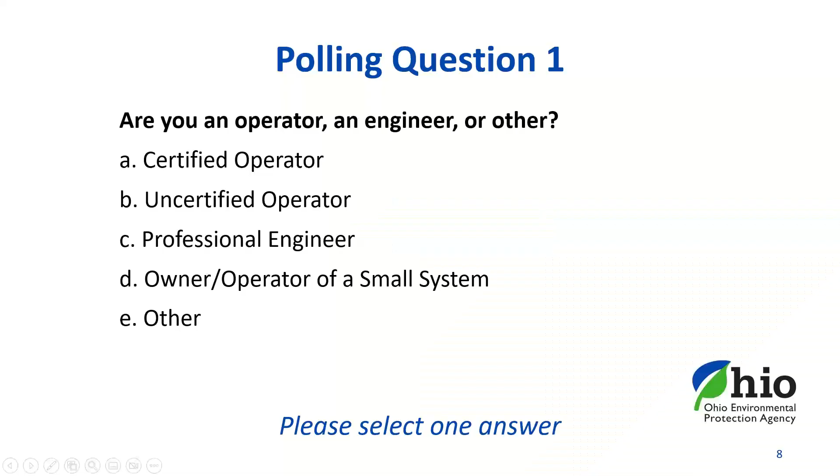Okay, so now we're going to go into the activated sludge process control and troubleshooting chart. I've been doing this, like I said, for 23 years, and I have pretty good control over what's wrong with treatment systems.

So, to begin with, way back in the middle 1970s, the Clean Water Act was enacted, and Section 104G1 was the section that provided for training for operators. Now in Ohio, the federal grant was used for equipment, supplies, travel, and training for us, okay? But some of the other states usually used it for their FTEs, and so they didn't have a whole lot of training equipment. But in Ohio, our positions were funded through normal revenues. But most importantly, and I say this very sincerely, the CAU had the support of management, and that is just so important for the CAU, to be honest.

So what we do is we provide on-site technical assistance to communities. And I really mean that, we do on-site, we go to the treatment systems. Typically, we go to smaller systems — the smallest ones are about 1,500 gallons per day — but we also go to large systems too. And if they have treatment issues, we can go and solve those problems as well. But what we do is we help operators overcome non-compliance with their NPDES permits. And you can call us directly, you can call your inspector, and then they can send an email to us, and then we can call you. This is really how it works, okay? We will get in touch with you one way or another.

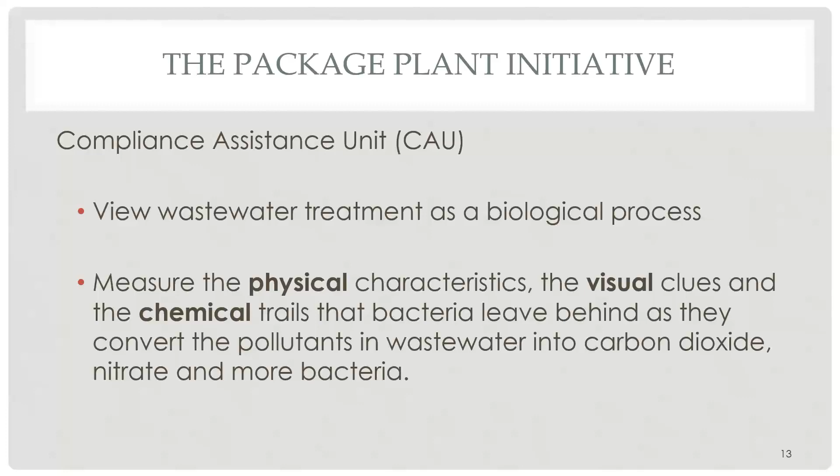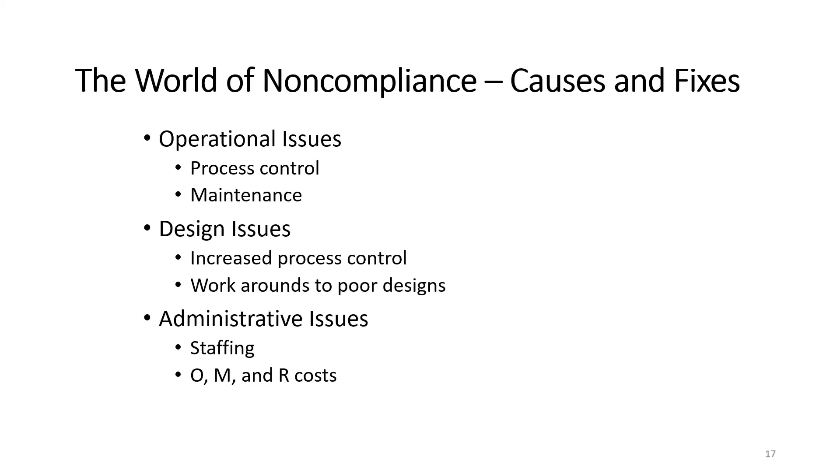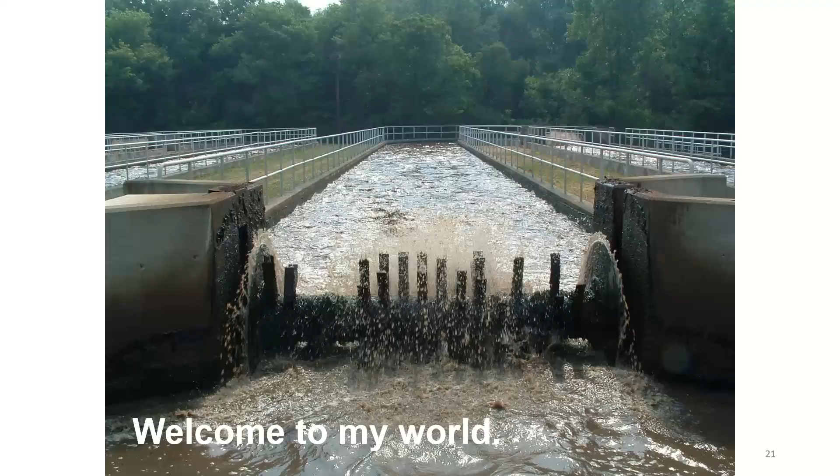Okay, so this is another treatment system, a little bit larger one, and they were wondering how come they didn't have enough DO in their system. Well, it looks kind of obvious, because that rotor right there was missing about half of its paddles that create the DO in the water. Okay, so yeah, that's welcome to my world.

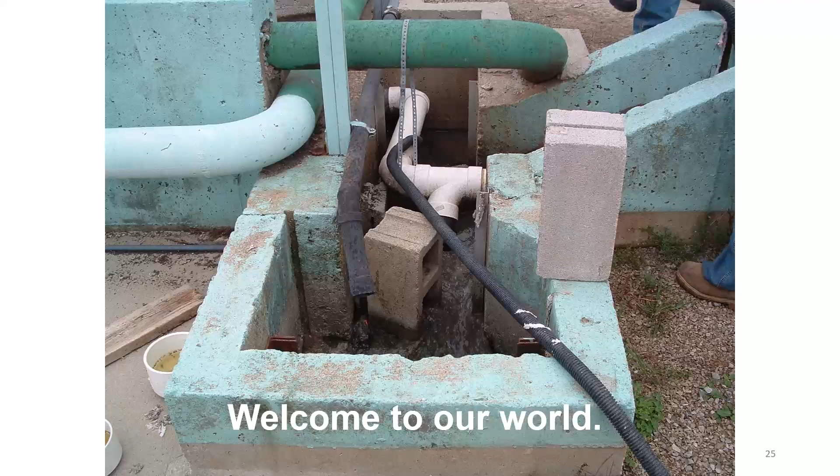Okay, well this one shows a block in a flow channel. This is where the influent flow comes in, and the operators are some of the most creative people in the world, because they can tell when one tank is full or one tank gets most of the flow and the other tank gets very little flow, and then they will do something to try to balance it out. Well, they put a block in, and that's pretty common. But the blocks aren't really all that useful to get the flows right. And they have a spare block right there on the side. But anyway, they're trying. Welcome to my world.

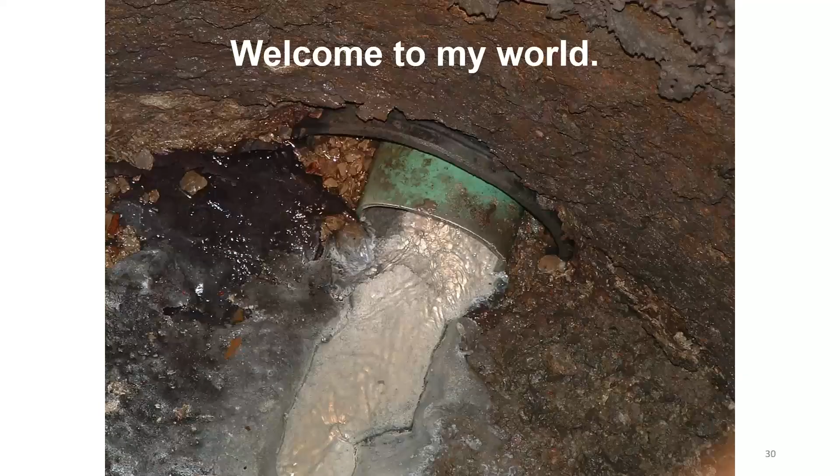And this one, this was a good one. This was one where, as you can see, the pipe is a 4-inch pipe, and the manhole core was drilled for an 8-inch pipe.

So we were sent there because in the spring, when there's a lot of rain and snow melt, all of the mainline manholes were flooded, so we really couldn't do very much. But later on in the summer, towards the end of August, we were driving to another treatment system and drove past this community, and we thought, wow, it's been pretty dry. So we went and popped a manhole, and it was about 20 feet deep, so pretty deep, and you couldn't really see down into the bottom of it.

So we took our digital camera, put the flash on it, took a picture, and this is what we found. We found that there was no gasket around the pipe, and the pipe was drilled for an 8-inch pipe with a 4-inch pipe in it. This is a small diameter gravity system. You can see the bedding back there, just to the left of the pipe, the gravel, that's what they put in to keep the pipe stable. This was up in the Northwest District, and the soils are pretty tight up there, but once the flow gets down to where the gravel is, it flows pretty well. So we had a lot of I&I coming in on the outside of the pipe, and sewage coming in through the inside of the pipe. We took this photograph to the village administrator, and he was kind of shocked, but he actually ended up sealing all these manholes in the main line, because it was really, really bad.

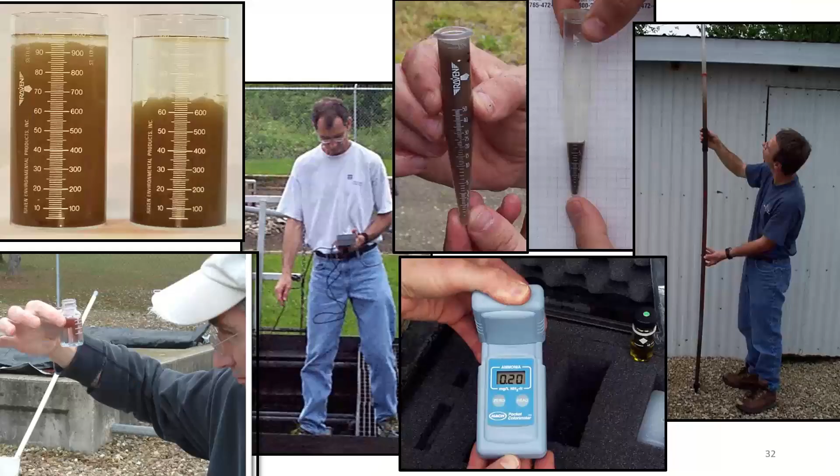And here are the tests, doing it in person, okay? There's the settleometers up above again, but below that, there I am years ago, doing an alkalinity test kit, okay, and looking at it. There I am again with the DO probe, and I am at the end of the tank, seeing how much DO is in that position.

Next to that, above, are the centrifuge tubes. The one on the left is that's what it looks like when you pour the aeration tank or the RAS or the core sampler into it. And on the right-hand side is what it looks like after it spins. It spins at about 5,000 RPMs, and it takes 15 minutes. And you can tell how much mass is in the aeration tank, in the core sample, and in the RAS just by using this, okay?

Below that is an alkalinity or an ammonia test kit. This is a single parameter test kit. It will just do ammonia. And for this particular experiment, it is 0.20, which is pretty low, which is good.

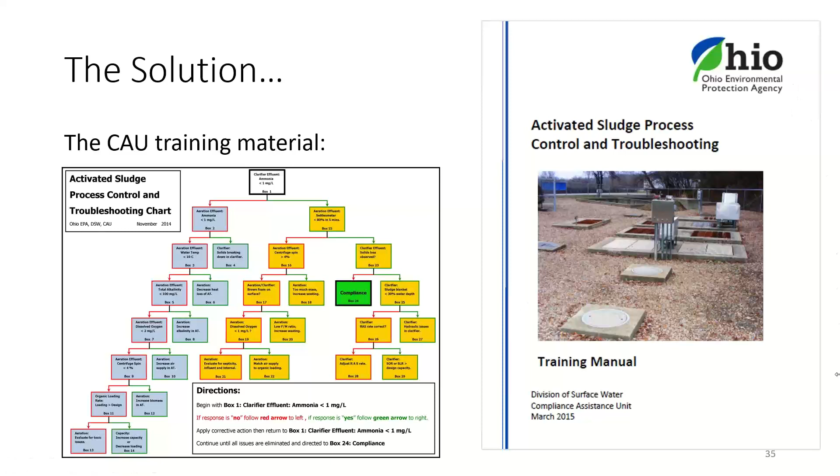So first things first, as Helen mentioned, some of the handouts to download. If you happen to have the activated sludge process control and troubleshooting chart printed off, it would be helpful to have that alongside with you here. You can follow along as we work our way down the chart, troubleshooting the issues.

So we're going to start at a very basic level, just a real quick concept for everyone of what's happening at a wastewater treatment plant. In the aeration basin, the pollutants, so your CBOD and your ammonia, they're converted to more bacteria. Then in the clarifier, the bacteria are separated from the clear water, so the bacteria can be returned back to the aeration tank to go back to work, and the clear water can be discharged.

What I'm going to talk about today on my portion of the presentation is actually going to be the conversion of the ammonia to nitrate, or possibly the lack of conversion of ammonia to nitrate.

So here's that troubleshooting chart that we referenced, that you've seen a couple times so far in the presentation. What you do with the chart, you start at the very top on box number 1. On the left side of the chart, the blue boxes that are circled right now are the conversion portion, converting the ammonia to nitrate. The right side of the chart is what Andy's going to be talking about in a little bit, and those are all separation issues, whether clarifier issues or the type of bacteria or filament growing in the plant.

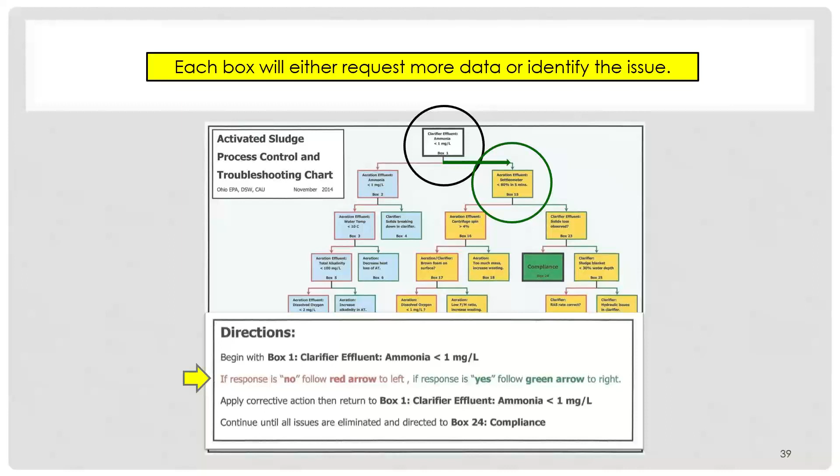And then you continue working your way through the chart until you reach box number 24, which is you're in compliance. So we're going to jump into another poll here right away.

It's poll question number 4: what are 2 basic things that an operator must achieve to maintain compliance? A, dissolved oxygen and CBOD. B, TSS and chlorine residual. C, conversion and separation. D, pH and ammonia. And E, nitrate and orthophosphate.

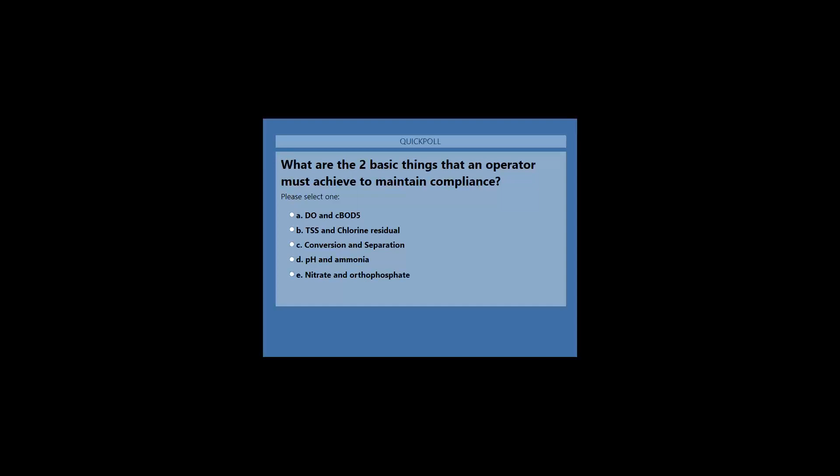Okay, so it looks like about half of the group selected conversion and separation. That's great, that's what we're talking about today. That's the CAU method the chart is based on. About a quarter selected DO and CBOD, and pH and ammonia, so everything is important for compliance depending on your permit requirements, but we're talking about conversion and separation today, so there's really no wrong answer.

So, okay, we're going to jump right into the chart here. Once again, everything I'm going to be talking about today is going to be that left side of the chart, those blue boxes, if you have the chart in front of you. When we're talking about conversion, we're talking about converting all the pollutants, the CBOD and the ammonia, into more bacteria.

So we start with our chart at the very top, box number 1, which states: is the clarifier effluent ammonia less than 1 milligram per liter? At the CAU, we run process control tests on ammonia because we can easily get an ammonia concentration within 20 minutes or so in the field. The CBOD test is a 5-day test, definitely not a field parameter.

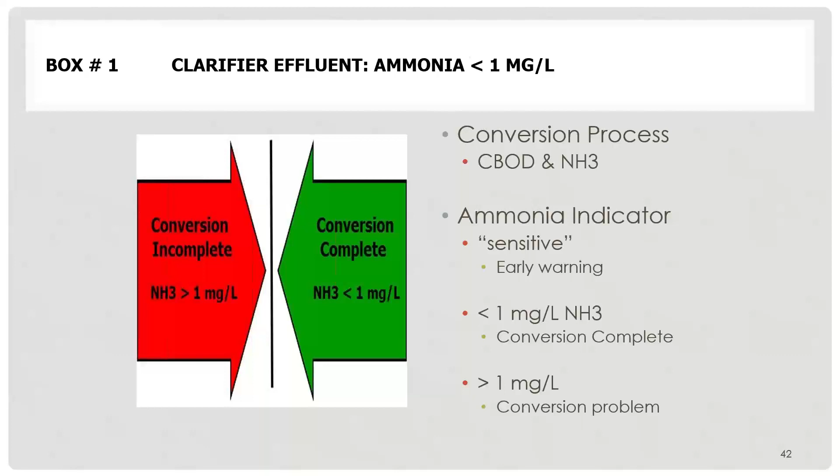We'll work our way down the chart until we identify the limiting condition preventing complete conversion of ammonia to nitrate. So the first question is, how do we measure ammonia?

And as John mentioned, it's more of a pass-fail test, the fish test kit. The actual meter will give you a number and a result. This is just, depending on how you look at it and match it up, you can't really go by that.

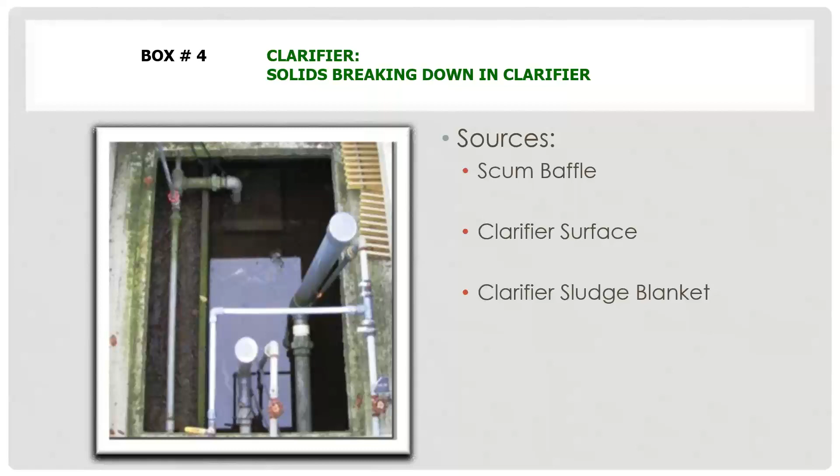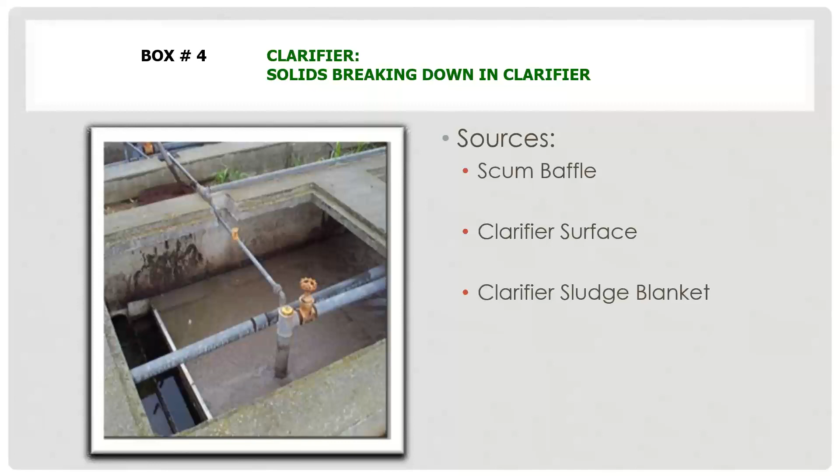Another source is from the clarifier surface. In this picture, the entire clarifier is covered with a thick layer of solids, with the exception of the outlet weir and outlet baffle. When solids sit on the surface for a long period of time, they can also release, just like in the scum baffle, ammonia into the water column of the clarifier.

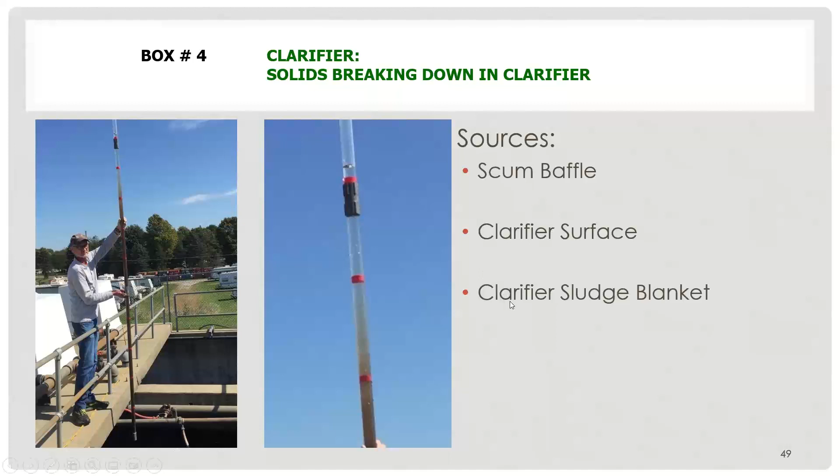When solids occupy roughly 85% of the clarifier, that means they're staying in there too long, and they'll start to break down and go septic at the bottom of the clarifier. A clarifier is not an aerobic environment, so the solids will start to lyse and release ammonia back into the water column. A very thick sludge blanket can be a source of ammonia release in a clarifier.

So regarding box 3, at this point we've answered no to box 2, which stated that aeration effluent ammonia was less than 1. We've now jumped to box number 3, which asks: is the aeration effluent water temperature less than 10 degrees Celsius?

Temperature is very important, mainly in the winter time. When the temperature in the aeration tank drops to 10 degrees Celsius or lower, the bacteria start to slow down and become less active, especially nitrifying bacteria that we're looking at for ammonia removal. The colder temperature also results in a slower growth rate of the bacteria, and in turn you can have slower conversion of ammonia to nitrate.

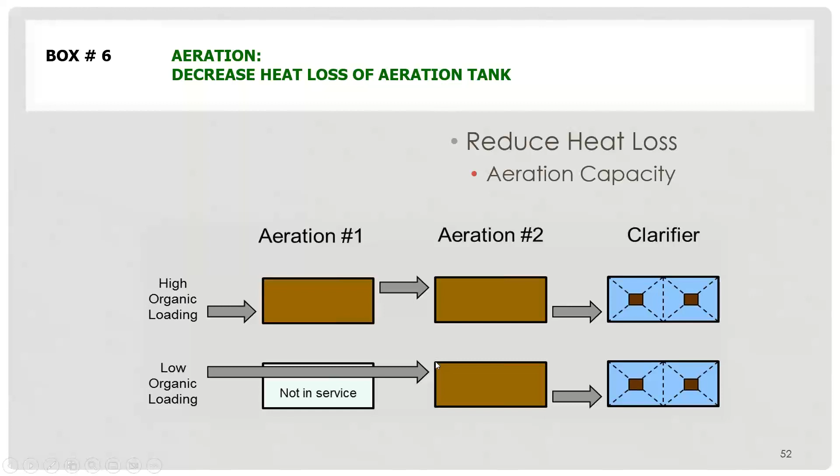Another way to help minimize heat loss in the aeration tank is to use a timer on your aeration blowers. We are big advocates for timers on small systems. If you think about a small system, most of them are not getting flow 24/7. Something like a school, church, small business, or gas station - most of their flow is usually received during the day and very little overnight, maybe even none overnight. So with little or no flow coming in at night, there's little to no food for the bacteria entering the plant.

Therefore, your DO demand would be very low in the winter, or at night when there's very little food coming in for the bacteria. In addition, most small package plants have their aeration tanks buried in the ground, which also helps provide some level of insulation for the mixed liquor in your aeration basin. So if you're able to run the blowers on and off at times, you are able to conserve some heat in the aeration tank.

One thing to keep in mind with the timers is you never want to go very long extended periods of time with the blower off, because not only is the blower aerating and adding dissolved oxygen in the aeration basin, it's also functioning to return solids from the clarifier in most plants, returning the return sludge back to the aeration. So if you have extended off periods, you run the risk of denitrifying the solids in the clarifier, which would then cause solids to surface on the clarifier, and you could lose solids. Andy's going to go into a little more detail on that when he gets to his portion of the presentation.

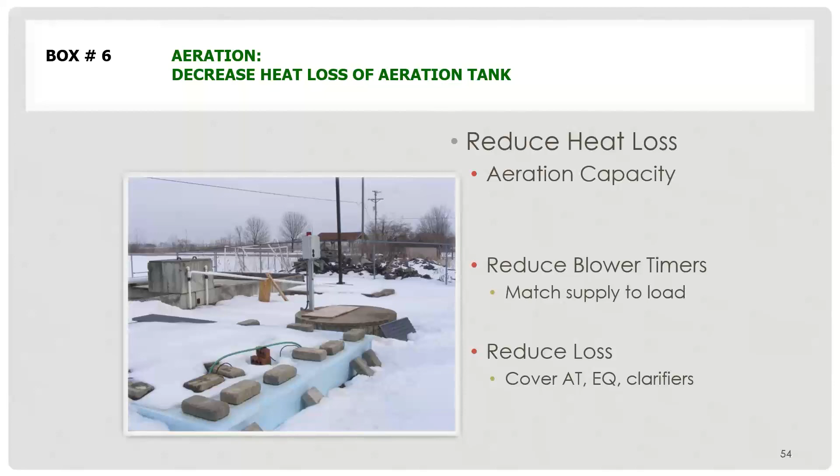Another good option that I see on a lot of plants I go to is using heavy rubber mats. Some have used stall mats from a dairy farm. They're really heavy, so they're great - they don't blow away. They usually just place them on top of the grating on the tanks to help conserve some heat in the winter.

You can see, a lot of this is kind of typical grating that you'll see on a lot of package plants, and you can see how well the styrofoam, this operator cut the styrofoam to fit into those grates.

One other side benefit of covering is a lot of plants will go ahead and cover their tanks in the fall or early fall, late summer. That way, when the leaves start falling, if you have a lot of trees around your plant, it prevents a lot of that from falling into the system. I've seen several small clarifier returns get plugged up with leaves and other organic matter falling in. So that's another little benefit of covering.

So it looks like we're up to another poll question, poll question number 5. How do you measure ammonia concentration in your wastewater treatment plant? A, I don't. B, ammonia probe. C, ammonia test kit. D, I send samples to a contract lab. Or E, I use an aquarium or fish test kit. Please select one answer. Okay, I have launched the poll, so please make your selection.

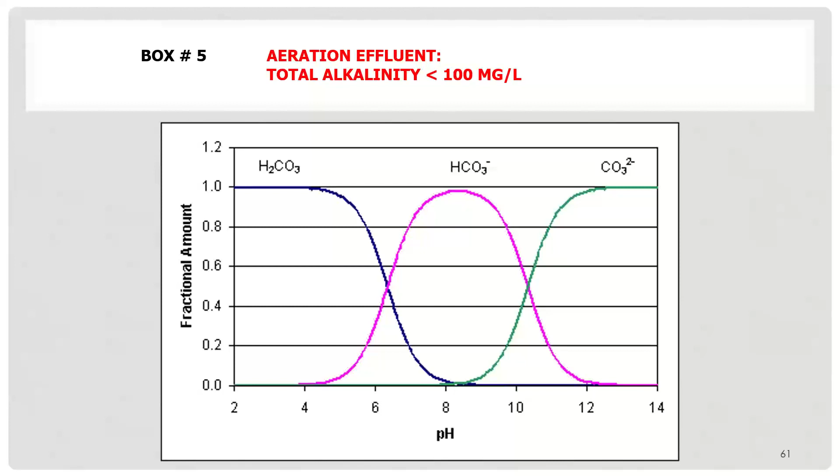So in order to increase alkalinity, we recommend adding sodium bicarbonate. This chart shows why we recommend bicarbonate. On the y-axis is the fractional amount of alkalinity, the form of alkalinity, and on the x-axis is the pH. If you look at roughly between 6.5 to 9.5 or 10, the dominant form of alkalinity is bicarbonate. Hence our recommendation of adding sodium bicarbonate when you need to increase your alkalinity.

So what you want to do is add this to the aeration basin if you are short on alkalinity, and you always want to try to dissolve this in water prior to adding it. It's not very soluble, so we recommend mixing up a third or half the bag at a time in a large bucket of water, then dumping that into the aeration basin while the air is running so it's fully mixed. If you add the dry powder directly to the aeration basin, since it's not very soluble, it has a tendency to just sink to the bottom, and you may not get the full effect of having all that bicarb into the system.

The nice thing about sodium bicarbonate is, one, it's fairly cheap, usually $15 to $20 per 50-pound bag at a feed store. It's safe to use. It doesn't pose any corrosion risk to anything at the wastewater plant. It doesn't pose a risk to the health of the bacteria we're adding this to the aeration basin, as well as the health of the operator that's going to be mixing this up and putting it in the aeration basin.

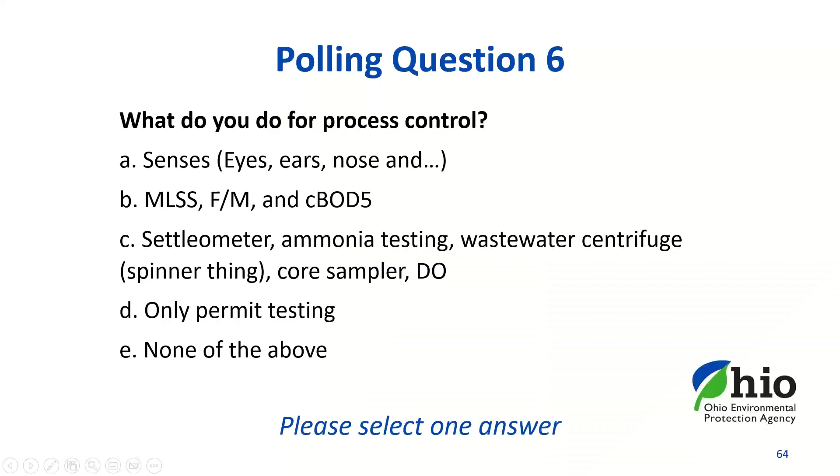So then box 7 brings us to: do we have enough dissolved oxygen in the aeration basin? Is your aeration effluent DO less than 2 milligrams per liter? I think that's the question in box number 7.

So one thing about dissolved oxygen, it's less soluble in warm water than in cold water. So in the summer, when the water temperature in the aeration basin warms up, you may not have enough DO where maybe you used to have enough DO in the winter and that wasn't a limiting condition. Or maybe you have a timer on your blowers, which I said we advocate for, but maybe there's not enough on time, so we're not adding enough dissolved oxygen to that warmer water in the summer.

So in order to check your DO, you take a DO probe. If you do not have a DO probe/meter, Ohio EPA district offices - each of the 5 offices across the state - have roughly 8 DO probes as well as wastewater centrifuges that can be loaned out to facilities, which they can borrow for X amount of days or weeks or months.

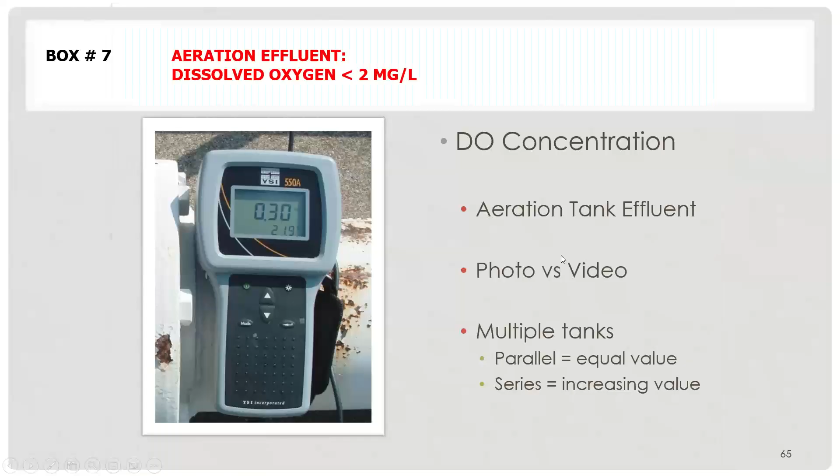So what he would do is during the day, he'd get there in the morning, turn on the second rotor to allow for increased dissolved oxygen during the day, and then at night he'd go back to just one rotor.

So that was one example of needing to increase the air supply to his oxidation ditch, or in a smaller plant, an aeration basin.

Here's some other things that may be causing the low DO. Could be diffusers that are plugged or clogged, not allowing all that dissolved oxygen to go into the water. Another option is timer settings—maybe they need to be adjusted for longer run times to provide more DO into the aeration basin. Another option is you need to turn on another blower during high organic loads, just like that operator did with his rotor—during the day, he turned on the second rotor to input more dissolved oxygen into his mixed liquor. Could also be a mechanical issue—do you have a blower or a diffuser that's not working?

I was at a plant just a couple weeks ago where they weren't getting much air into their aeration basin. They contacted me, and we ended up determining they had 2 blowers, and one of the check valves had gone bad. So when one blower was working, most of the air was flowing back into the blower on standby, and it was running in reverse. So they were losing a lot of air to the atmosphere, and it wasn't going into the mixed liquor.

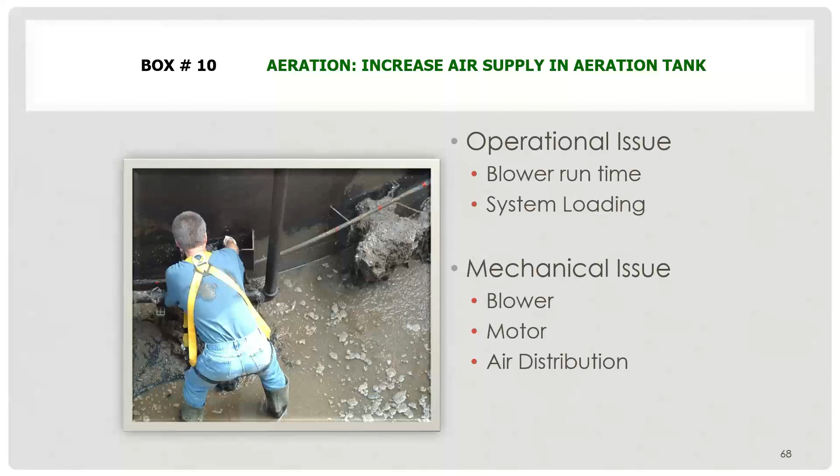Or it possibly could be an air leak. Maybe you just have a line that's either above ground or below ground, and the air's not making it to the aeration basin.

Here's a picture that we talked a little bit about of a plugged diffuser or blocked diffuser. This plant was having ammonia issues. We pulled the diffusers, cut into one of the drop pipes, and you can see all of that sediment, silt, and solids that have built up over time. Not enough oxygen was going into the water, so they were having ammonia issues. We replaced the diffusers, and within a day, the ammonia was back down to below 1.

Here's a picture of that timer again, and as we talked about earlier, maybe the timer settings from the winter aren't providing enough dissolved oxygen during the warmer months when the DO is not as soluble. So maybe you're only getting partial nitrification. Making adjustments to the timer may be as simple as adding a couple additional runtime periods, making them longer to increase the DO. Instead of having short on-cycles, maybe you need some longer on-cycles. So that's something to keep in mind and look into.

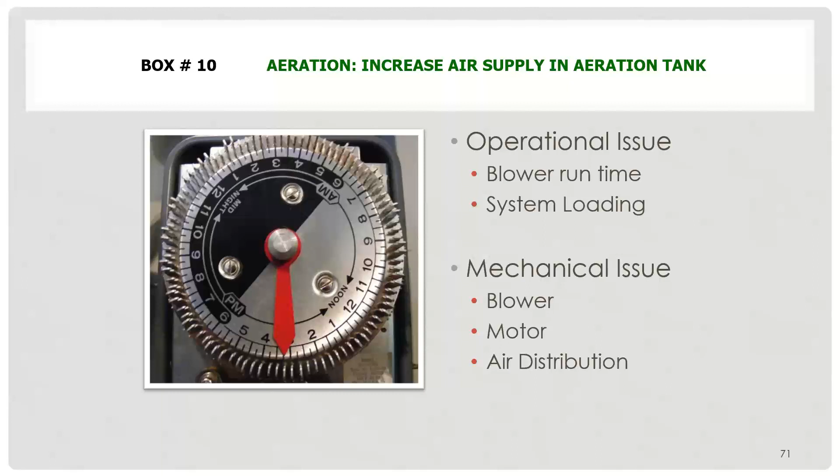Okay, so right now we're down to box 9. In order to get to box 9, we've determined that our aeration effluent water temperature is greater than 10 degrees Celsius, so we have plenty of temperature; that our total alkalinity is greater than 100 milligrams per liter, so it's not an alkalinity issue; and we've determined that we have enough dissolved oxygen in the system. That takes us to box number 9, where we're evaluating to determine if we have enough mass in the system to oxidize all the ammonia.

If there aren't enough bacteria in the aeration tank, this can be the result of high ammonias. Perhaps you wasted too much out of the system, maybe too many solids into the sludge holding tank or into your digester. Maybe a lot of the mass is still in the clarifier, maybe you have a very high sludge blanket. So the solids are sitting over there, which aren't doing you any good in terms of ammonia removal.

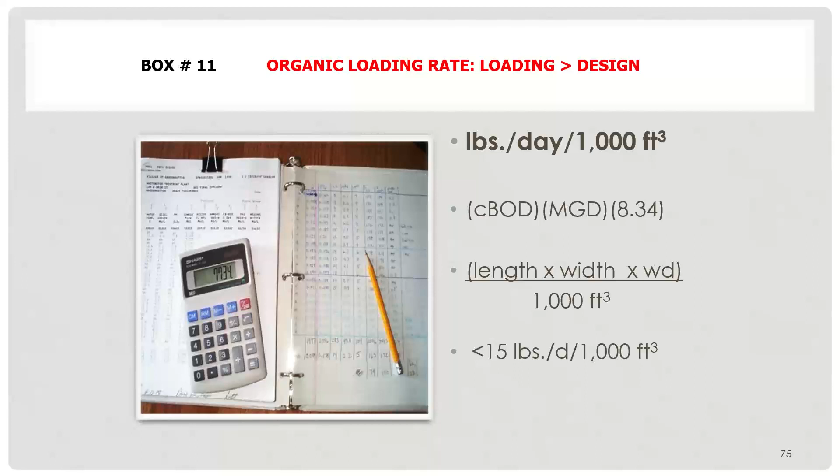So to look at the organic loading to the plant, which is calculated in pounds per day per 1,000 cubic feet, 10 State Standards states a plant should not have a loading over 15 pounds per day per 1,000 cubic feet. To calculate the pounds, you take the CBOD times flow, which is in million gallons per day, times the 8.34 conversion factor, and that gives you pounds per day. To calculate the cubic feet of the aeration volume, you take the length, width, and water depth of the aeration basin, times it by how many basins you have, and then divide by 1,000 cubic feet.

So let's go through a quick example. In this example, we have 4 aeration tanks or basins in series. They are 6 foot by 16 foot wide by 10 foot operating water depth. If you multiply all that together, that gives us 3,840 cubic feet.

Some of the other information we need for this formula is the flow. In this example, our design flow is 28,700 gallons per day, or 0.0287 million gallons per day. This next number is one we can't calculate in the field—it would actually be an influent CBOD test, so you'd have to do a sample on your influent flow coming in. In this example we used 238 milligrams per liter of CBOD coming into the plant.

So to calculate the pounds, we take that formula from the previous slide—the 8.34 conversion factor times our flow in million gallons per day times our concentration of influent CBOD—and that gives us 56.9 pounds per day of CBOD. We then calculate how many 1,000 cubic feet we have: we take the 3,840 number from above, divide it by 1,000 cubic feet, and that gives us 3.84 thousand cubic feet.

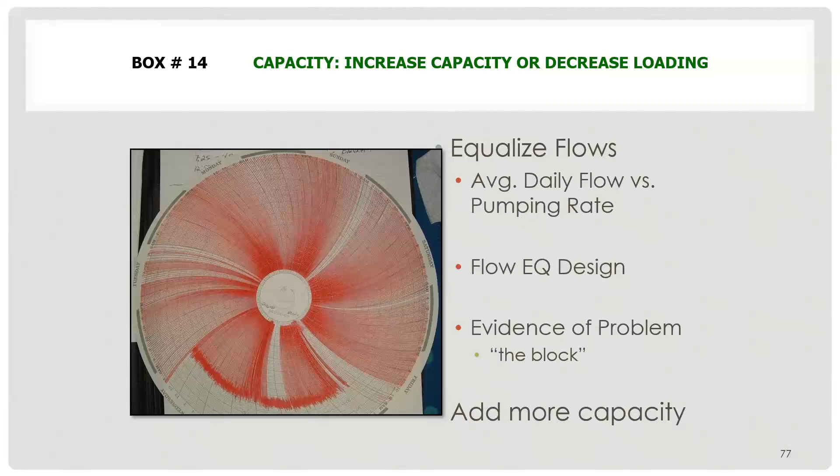John had another picture of a cinder block in a flow channel. This was just another way to try to equalize flows between the two treatment trains, because unequal flow splitting can cause not only organic loading issues but also DO issues, as we talked about earlier. For example, let's say one treatment train is receiving 60% of the flow, and the other is getting 40%. The train getting 60% of the flow will most likely also have lower DO, because there's a higher DO demand since more organic loading is going to that treatment train.

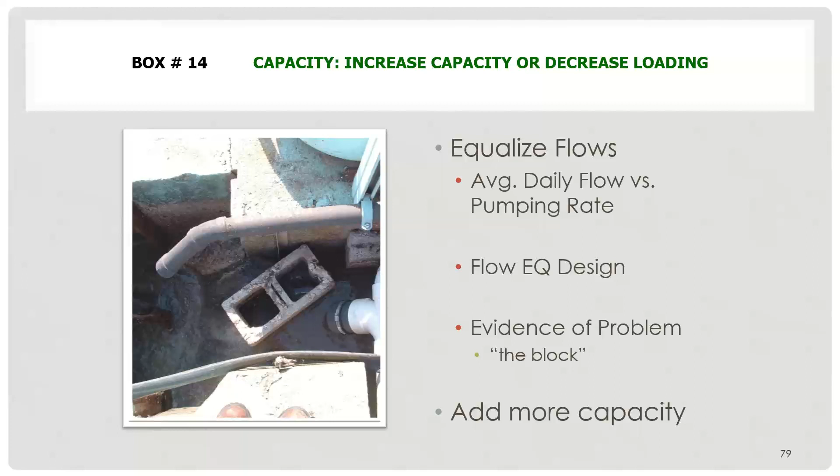Okay, so we're getting close to the bottom of our troubleshooting chart here. Box 13 is when we've ruled out that we have enough temperature, more than 100 milligrams per liter of alkalinity, plenty of dissolved oxygen, at least 2% spin in, enough mass, and we've ruled out that we do not have an organic loading or design issue. That takes us to box 13.

Box 13 asks us maybe if we have a toxicity issue, something causing the nitrifiers to be inhibited, or something impacting or possibly killing or not allowing the nitrifying bacteria to do their job. We hear a lot that something toxic came into the plant and killed the plant. That happens, but not as often as we usually hear it. Usually a lot of times, toxicity issues happen from something that's internal at the wastewater plant itself.

Most of the time it's usually related to very high ammonia coming back from a process, usually a digester, going back to the head of the plant and overloading the system with too much ammonia. Anaerobic digesters will almost always have high ammonias being discharged. That's just how they operate. You just don't want to overload the system when you're decanting or taking supernatant from your anaerobic digesters, sending back a large volume.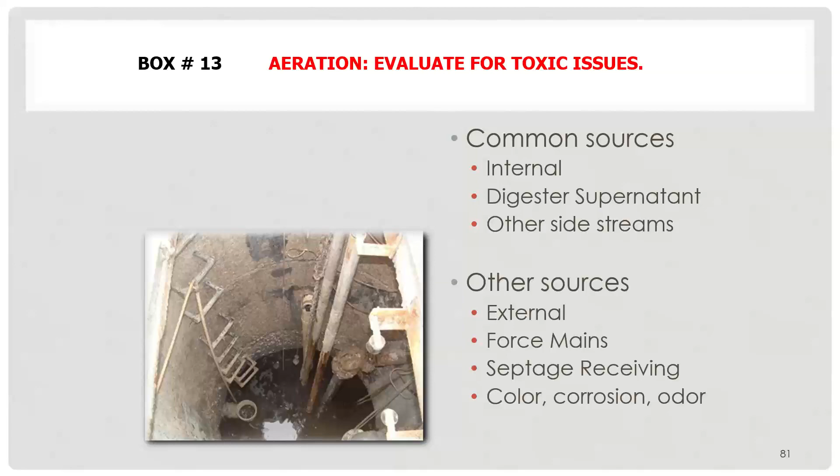So when you put the high organic load into the septic tank, as well as all that sulfur, you're going to get some hydrogen sulfide generated. The hydrogen sulfide in the collection system can create sulfuric acid, which had corroded pretty much everything that was in this lift station. That's just one example in the collection system of a possible toxicity issue. But remember, the takeaway from toxic issues is always look inside the fence first, always look inside the wastewater treatment plant to see if it's something you might be doing inadvertently that's creating an upset or a problem in your aeration portion of your plant.

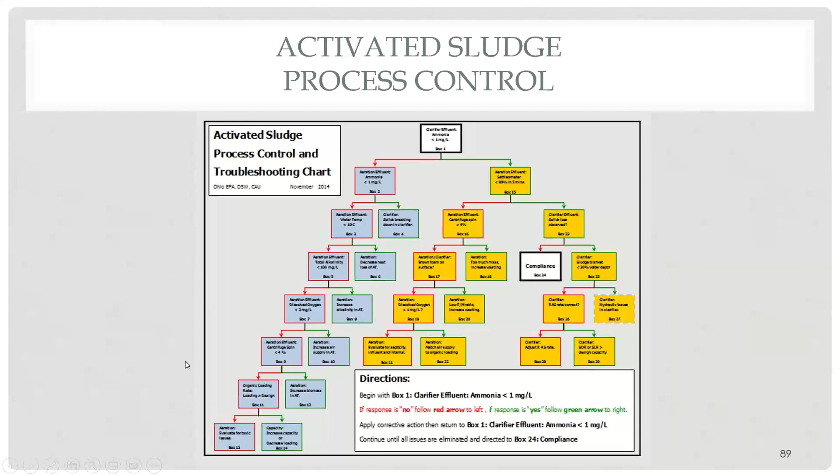So you've done a good job in your aeration tank. You've converted your ammonia, and that's the first step to good treatment in your wastewater treatment system. And now we're moving on to the separation portion of the treatment process, which occurs in the clarifier, and you need to have good settling in order to maintain compliance so that the water that you discharge from the plant will meet NPDES permit limits.

So back to our chart here. We're going to start at the top, and we're going to have our ammonia less than 1. But we're having some settling issues. So we're going to concentrate on the right side of the chart here. The first part of the chart is going to be settling issues, and then the right side of the chart is going to be clarifier issues that we have. So we'll start here on the first part.

So you've got complete conversion, and now we need to use our settleometer tools to do a separation analysis. We'll use our settleometer, which is the perfect clarifier, basically meaning that there are no hydraulic inputs or outputs that influence the clarifier or the settleometer, and it allows us to look at the settling closely to see how the biomass actually settles in our wastewater treatment plant.

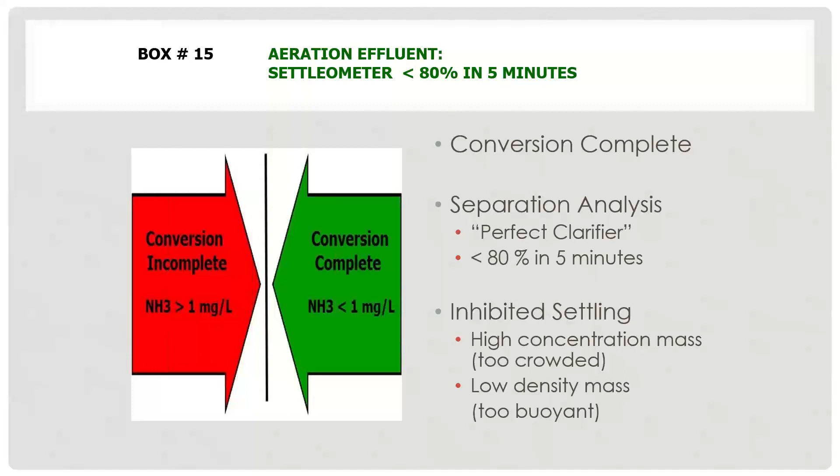And what we're looking for is we want to get our settling below 800 in the first 5 minutes. There can be causes of poor settling. You could have too much mass in the system, or you could be growing a biology or biomass that is not dense enough to settle and is too buoyant and won't settle. So you'll have to make some adjustments in order to address that.

You want to use, so what we're looking for, like I said, in the first 5 minutes is we want settling to go under 800. If it's above 800 in 5 minutes of watching your settleometer, then we have a separation issue and we need to investigate it.

So again, we're looking for this picture of the settleometer, the sludge in the biomass to settle so that it is under 800 in the first 5 minutes. What we found is that when that occurs, you have a low loss of solids out of the clarifier during varying conditions that the wastewater treatment plant sees.

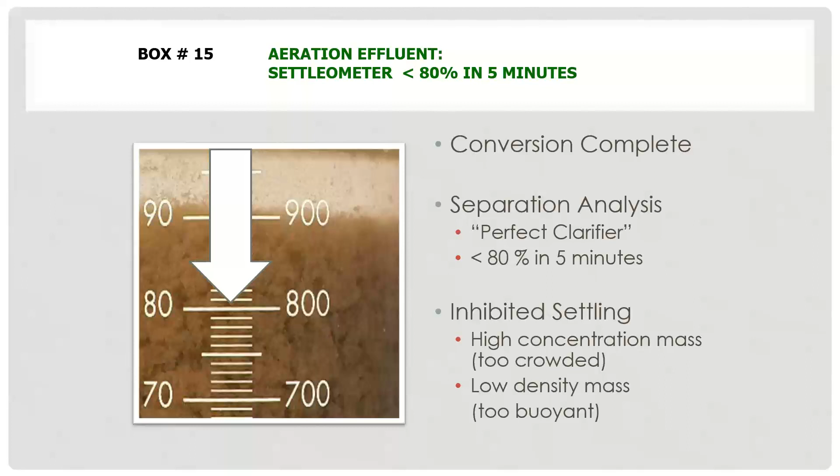Now moving on down the chart, if your settleometer is above 800 in the first 5 minutes and it does not settle below that, then maybe there is a problem with how things are settling.

The next tool that we use to investigate that is our process control centrifuge. So what we do is we take a sample of your aeration tank effluent and we put it in our centrifuge and we spin it down in 15 minutes and we read what the centrifuge spin is.

What we find is if the centrifuge spin is greater than 4%, we may have too much mass in the system and we would need to waste in order to address that mass system and hopefully improve our settling.

At the same time, if we have less than 4%, but we still have poor settling, we will do what is considered or what we call the diluted settleometer test. So we take two different settleometers.

In the top picture here on the right is a settleometer that's got 100% aeration tank effluent. The one on the left has 50% aeration tank effluent and then 50% clarifier effluent. We watch that for 2 minutes to see if we have good settling and how the settling differs in those two.

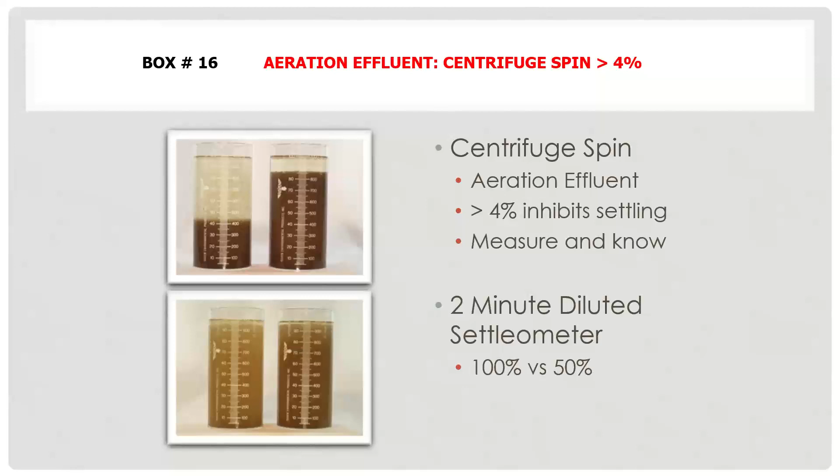So this here is our video of our diluted settleometer test. As you can see, we've got our samples in and we're stirring them up. You can see that it's gently stirring and the paddles are now removed.

As we watch it here, you can see some of the clear water starting to come up from the bottom of each settleometer. The settleometer on the left is full strength, and the settleometer on the right is our diluted settleometer.

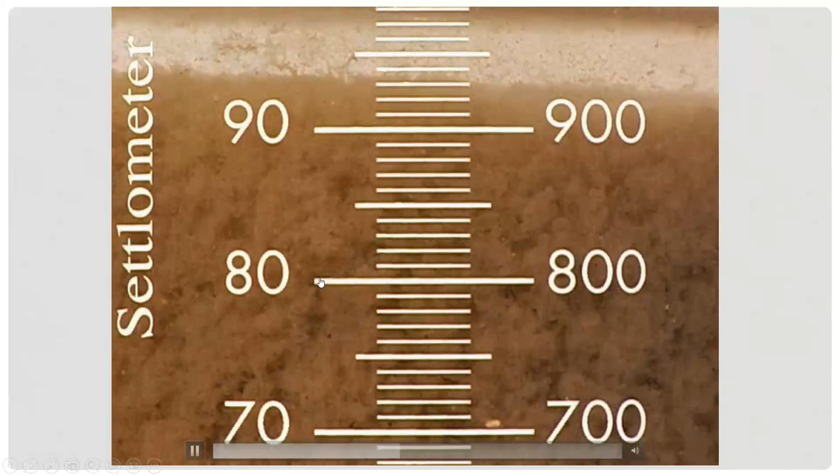Now, as you can see here, we're 30 seconds in, and we're starting to get some settling here. We're getting clear water on the top, but you can see that the floc is starting to form. You can see these bubbles. That's the clear water making its way up to the top, and the settling is coming down.

So it looks like in this particular settleometer, we're gonna achieve our 800 settling, or less than 800 settling in the first 5 minutes.

And this is an example of a concentration example. As you can see, the one on the left, it's the full strength. We're 1 minute and 30 seconds into this, and we don't really have very good settling. Very little clear water on the top.

What we're seeing is when we look here at the one on the right, the diluted settleometer settles much better. So what this settleometer test is telling us is that we have too much mass in the system, and that we need to waste some mass out of the system into our sludge holding tank, or have someone come and pump out some solids from the aeration tank and clarifier in order to improve our settling here in this example.

Now, moving on, here's another 2-minute diluted settleometer test. This one is an example of density. Again, we have 100% aeration tank effluent in the settleometer on the left, and a 50-50 mix of aeration tank effluent and clarifier effluent on the right.

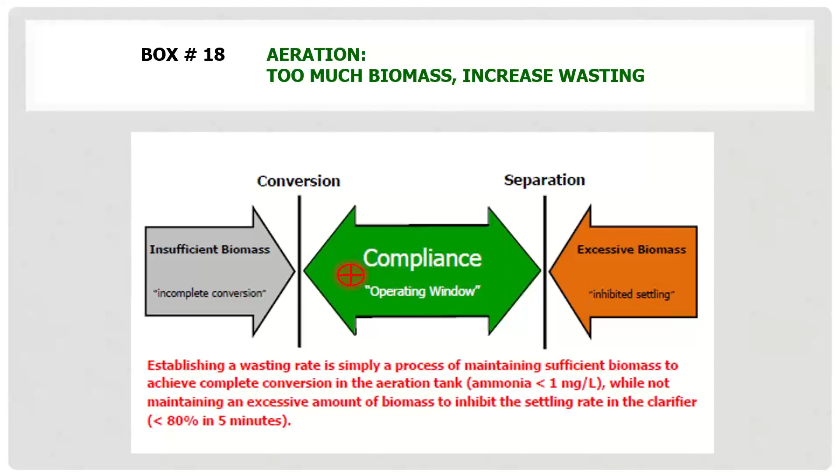If you don't have enough biomass, you're not going to get complete conversion and low ammonia. And then if you have way too much biomass, you're going to get poor settling. So you want to use the compliance assistance tools and process control to make sure you figure out what the compliance window is so that you have complete conversion of ammonia and enough biomass to have good settling, but not too much biomass that you have poor settling.

We've got greater than 80% settling in the first 5 minutes, an aeration tank spin of less than 4%, and a diluted settleometer analysis that shows very little settling occurring during that. And then we also get some coning in our settleometer. So that can be a cause of filaments.

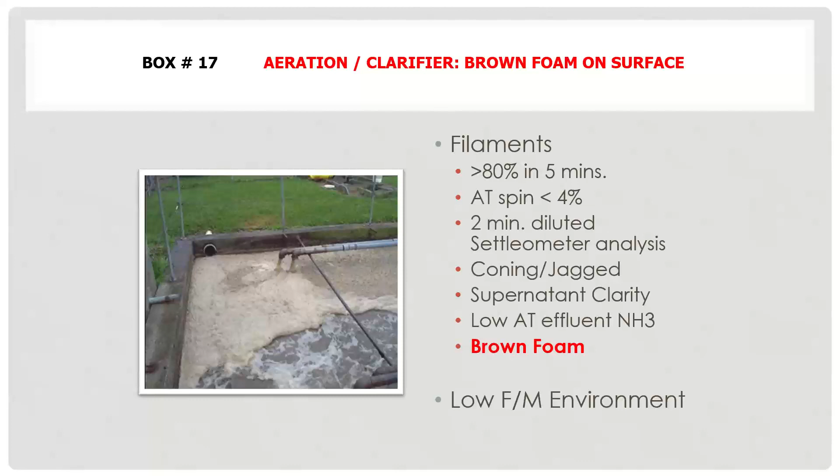Now, one area that is also an indicator of filaments is excessive brown foam on the aeration tank or the clarifier. Biological foam occurs in a low F to M environment in your wastewater treatment plant, which basically means there's more mass in your wastewater treatment plant than food coming in. And that creates an environment for filaments to grow. We call that a low F to M filament. So that is an indicator of filament growth that we look for as a visual cue.

And so the solution when you have a low F to M filament that you're growing in the wastewater treatment plant is to change your operating condition. In order to do that in the low F to M environment, we need to waste from our system and get some of the biomass out so that the influent food source matches the amount of mass in our system. So we increase the wasting rate from the plant to reduce the biomass, and we use our centrifuge process control tools to check how much mass we have in the system.

So typically, for example, your process control centrifuge may show an 8% spin, and you want to reduce that. Remember, as we said, our target is a 2 to 4% spin. So you want to reduce the mass out of the system in order to get things back into balance, and check with your centrifuge as you waste to see how many solids you have in the system.

Your settling should start to improve because you've started to waste filaments out of the system. Then, after you've wasted the filaments out of the system, you can start to remove this foam from the top of the clarifier. That will then improve things in your plant and help reduce the impact of that low F to M filament.

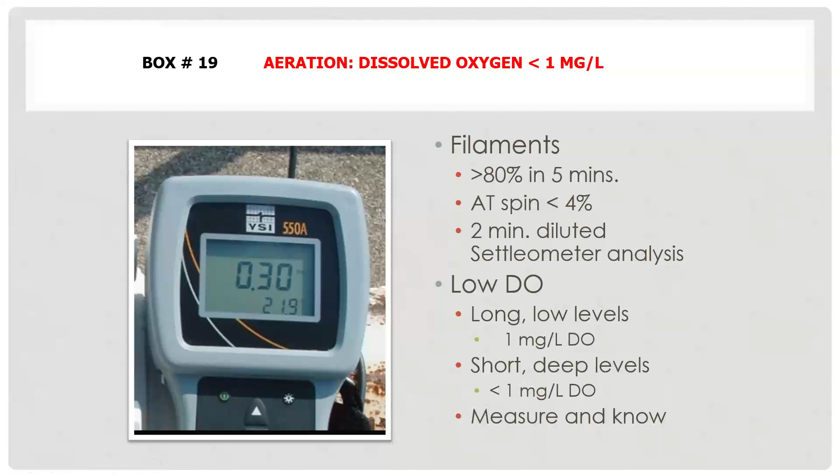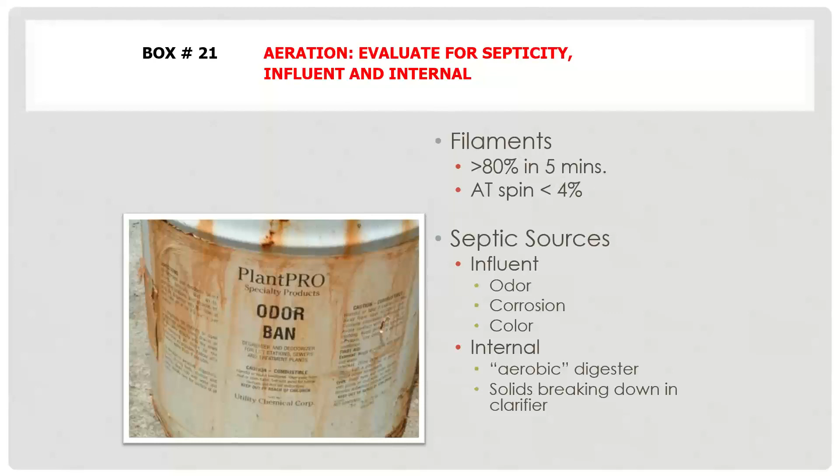If you have to use things like Odor Ban, or you have a strong rotten egg odor, that can be an indication of septicity. Do you have rusty grating on your plant? Lots of corrosion can indicate septicity.

Do you have internal sources of septicity? Do you have an aerobic digester that's got a lot of solids in it? It costs money to haul sludge out of the plant, so a lot of operators like to thicken and decant as much as possible. Periods where the air is off in an aerobic digester for long periods of time is a good environment for septicity filaments specifically to start to grow.

Do you have a long detention time in your clarifier? Do you have solids breaking down on the bottom of the clarifier before they're returned to the aeration tank? These can all be sources of septicity that you want to investigate and address in order to change the conditions that are ideal for septicity filaments to grow in your plant.

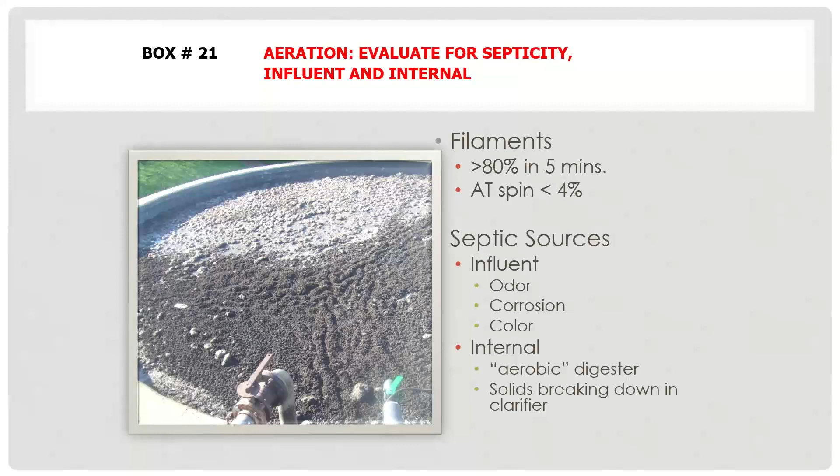Okay, so we made our way down the left side of the settling chart, which is the filament portion of the chart. Now we're going to move on to the right side and look at some clarifier issues.

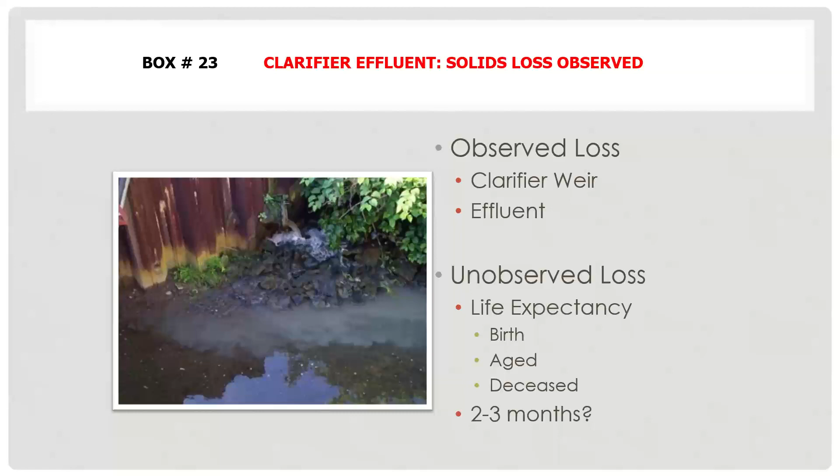Okay, so jumping back into it here, you've done your settleometer test. You've got settling that's less than 80% in 5 minutes, but you're still having solid loss from your clarifier. So we need to start investigating that. The number one indicator is solids loss in the stream. Obviously, we don't want that. We want to make sure that we aren't having solid loss in the stream.

Some of the things that we start to look at that may identify a clarifier issue is biomass buildup in the effluent weir. Too much solids in our clarifier can also be an indicator of a clarifier design issue or an issue that we need to look at.

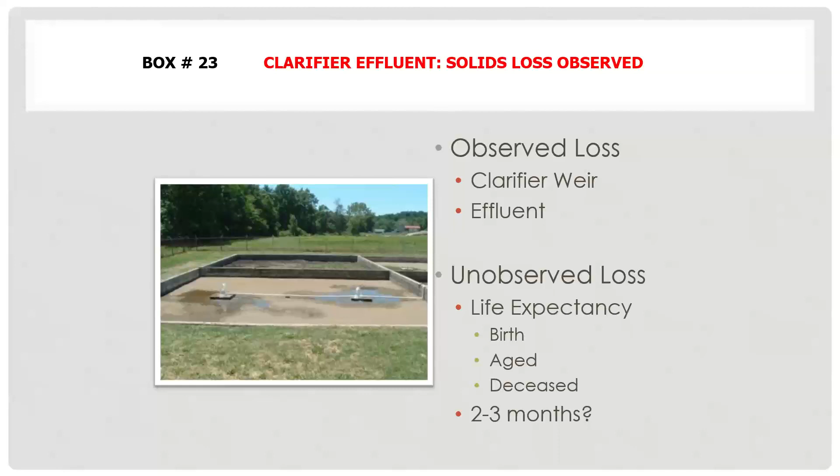The other thing that we take into account is sand filters. Do we see solids build up on the sand filters? Now, in this picture, this is a young sand filter. We don't have a lot of solids loss. Water's being dosed onto the sand filter and is going down through the sand in a relatively short period of time before it reaches the walls of the sand filter.

So in this instance, we definitely want to have those sand filters cleaned in order to restore performance. But the sand filters are not really the cause of our problem. It's more the clarifier issue that we should back up and investigate.

Typically, we'd recommend that you get 2 to 3 months of service out of a sand filter before you need to change it to a different one, if everything is operating correctly. As you lose more solids from the sand filter or from your clarifier, you'll get decreased life out of that filter.

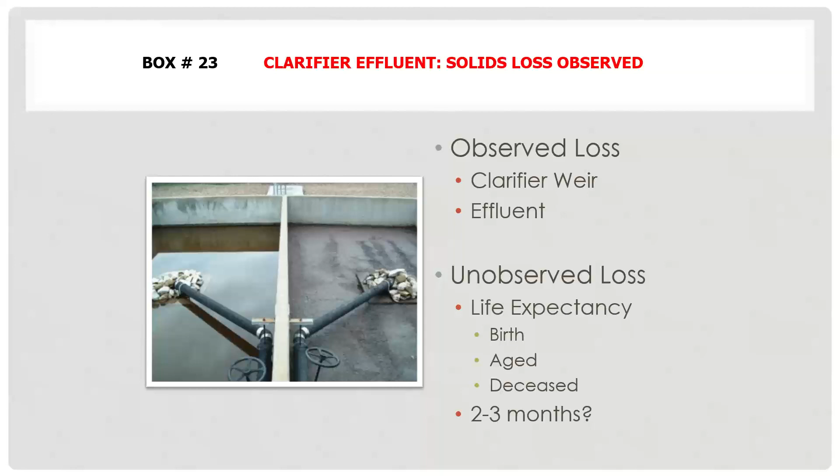Now, if you've got good settling and low ammonia, you're in that compliance window. You've got acceptable separation, good settling, and your settleometer under 80% in 5 minutes, you know you shouldn't have a solids loss issue. If it's above 80% in 5 minutes, then you probably need to make some adjustments to the clarifier or investigate for possible filaments.

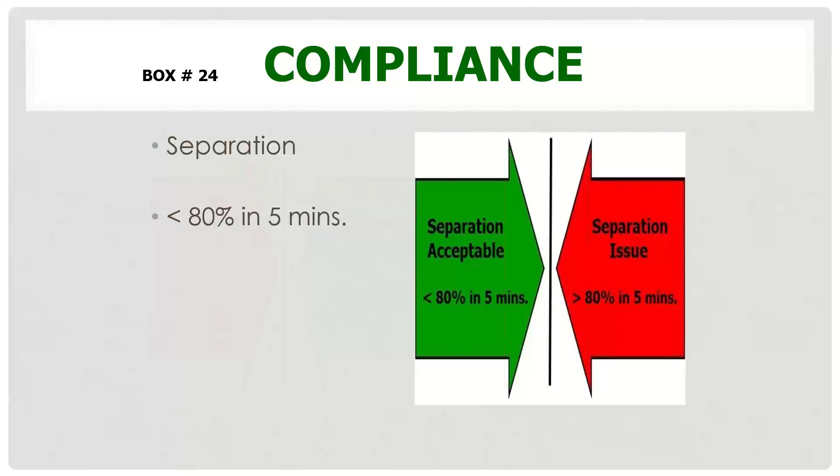By measuring and taking a look, you really get an idea of how big your operating window is. If you've got complete conversion and ammonia removal in your aeration tank, and good settling, you know where your compliance window is. By taking regular process control samples, you can make adjustments as needed, and you as the operator have a little bit more control of the plant.

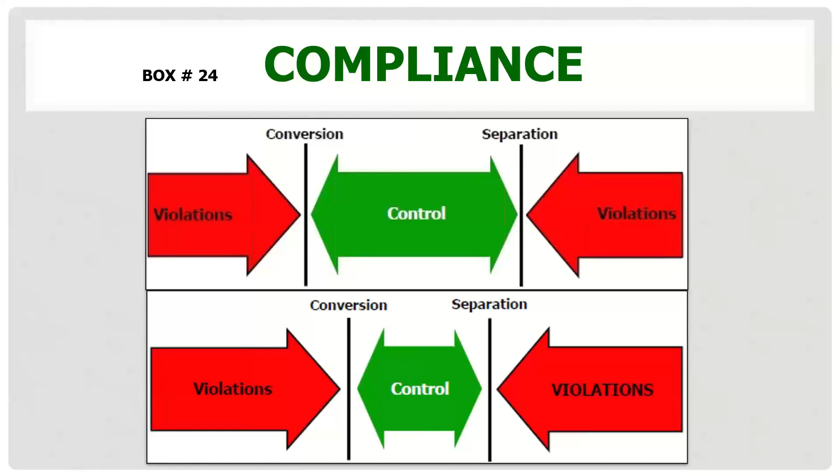Now, you may still be in compliance and whatnot, but you have a smaller operating window, I guess, if you don't have some process control samples, or at least that's what we would advocate. Your process or your window is a lot smaller when you don't have data to support your operational decisions.

Moving into box 25, though, if we still are having solids loss, one thing that we want to look at is the settling in our clarifier.

You do that through adjustment of your return activated sludge rate, that controls the amount of sludge pumped out of the bottom of the clarifier. You want to keep your sludge blanket about 20 to 30% of the depth of your clarifier, and you can use a core sampler to verify that.

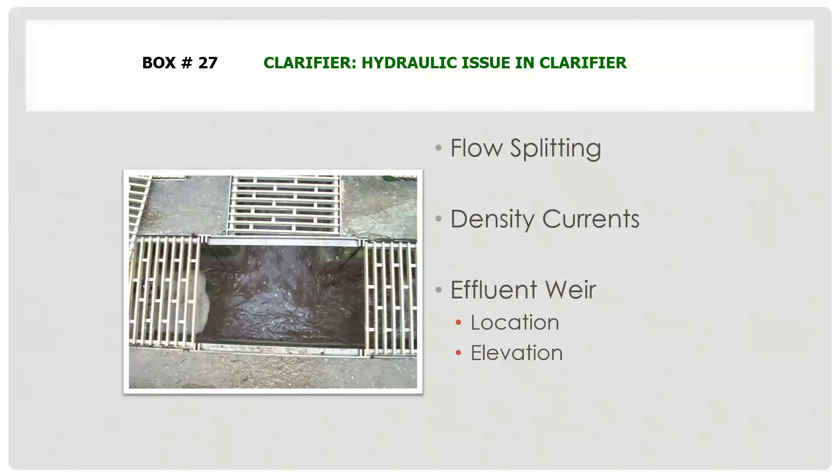In this example, we have a flow splitting box that's got no weirs, no control, for directing that flow. This is a live example of a hydraulic issue that our team investigated several years ago.

As you can see, this is a channel, and it narrows down here at the end in an attempt to control the flow. That's a poor way to do it, because in this example, the way it is currently set up, all of the flow goes to this clarifier here at the very end, and none of the flow goes to this clarifier at the beginning.

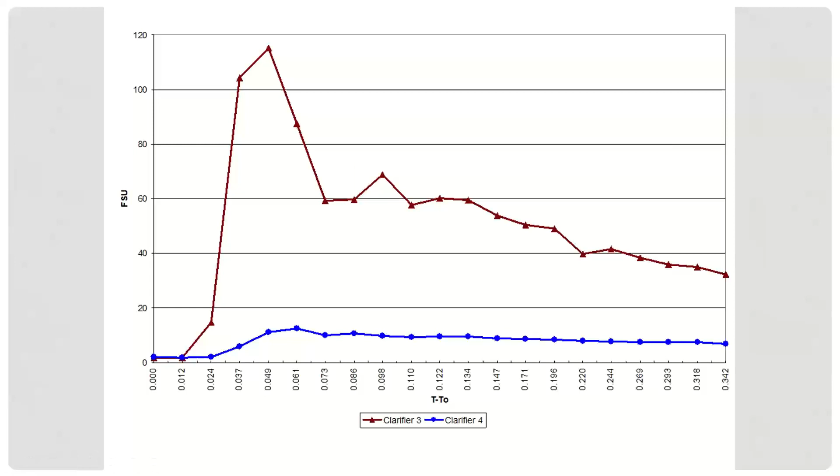Again, here's before the plywood plates were installed - you can see clarifier 3 got most of the flow. After the plates were installed, the flow to each clarifier was better split. It's not perfect, but as you can see, it came closer together. 3 and 4 are a little bit closer than they were, a lot closer than in the beginning.

So that's how hydraulic issues can impact your clarifier. Density currents can cause another issue: short circuiting and solid loss from your clarifier.

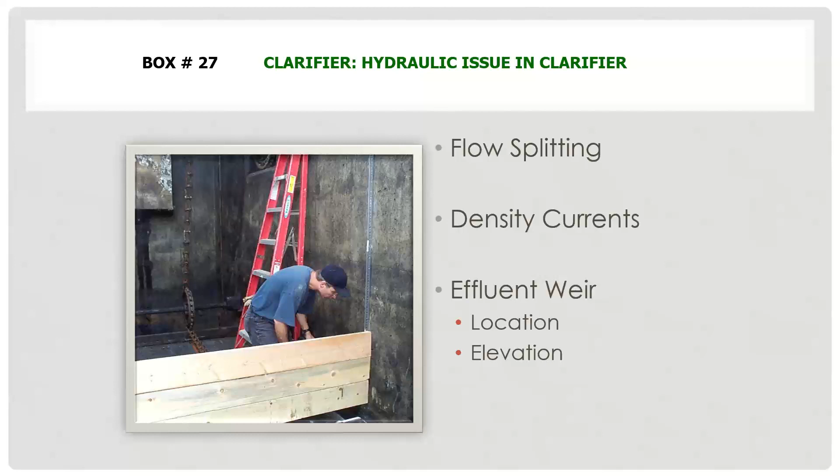Here's an example of installing some baffling in a clarifier in order to reduce solid loss from density currents. Basically, they mounted some angle iron to the walls of the clarifier in the middle, and then put boards across the clarifier to help break that up and reduce the solids loss and carry over from the clarifier.

You can also do the same thing in a package plant clarifier - the lattice will break up a density current. In this example, we created a flocculation baffle at the influent end of the clarifier by extending the scum baffle down to within 2 feet of the bottom of the clarifier, which breaks up that density current that could cause solids to be lost out of the clarifier.

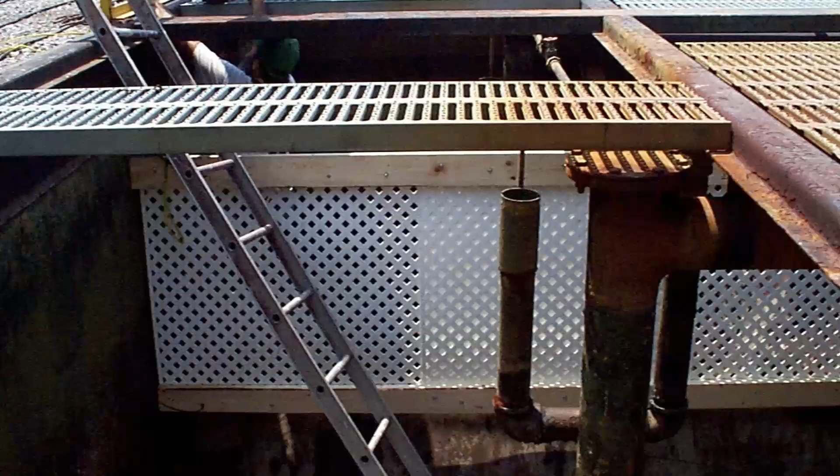Another option in a package plant clarifier is to put a baffle midway through the tanks. This is a more difficult option, but again, one that can be done with some angle iron on the side of the clarifier and then some boards and baffling lattice through there. One thing to keep in mind is that you want the top of that baffle and lattice wall to be below the surface so that your skimmer will still function for all of the clarifier, so you can get some of that floating solids back into the skimmer system.

Here's just another picture of that midway baffle. You can see it's between the two hoppers in the clarifier, and that'll help reduce solid loss across the top of the clarifier.

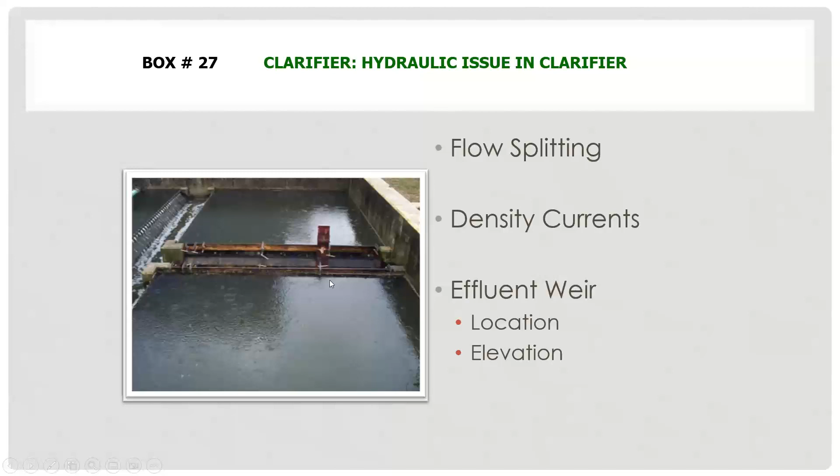And it's time for another poll question. What can cause solid loss? A, high influent flows. B, too much biological mass. C, too little biological mass. Or D, too slow of a return activated sludge flow rate. Or E, all of the above.

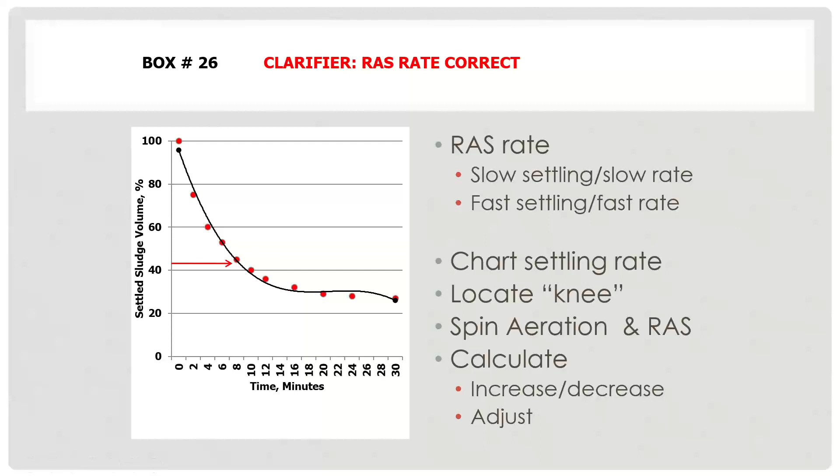And then we take our aeration tank. So the knee of the curve is really the ideal settling that we want. Then we take a sample from our aeration tank and our return activated sludge, and we spin those down. And then we use those spin numbers to calculate our ideal RAS rate.

As you can see here, as we work through this is our settling, and that's the knee of the curve, occurring at about 20 minutes. So the ideal settling is at 42, and in 30 minutes we get down to 38. But what we do is back it up one, because we don't know exactly where that occurs, so we don't want to waste too much out by backing it up too far. So we'll back it up one for our calculation, and our target settling is 51% in 15 minutes.

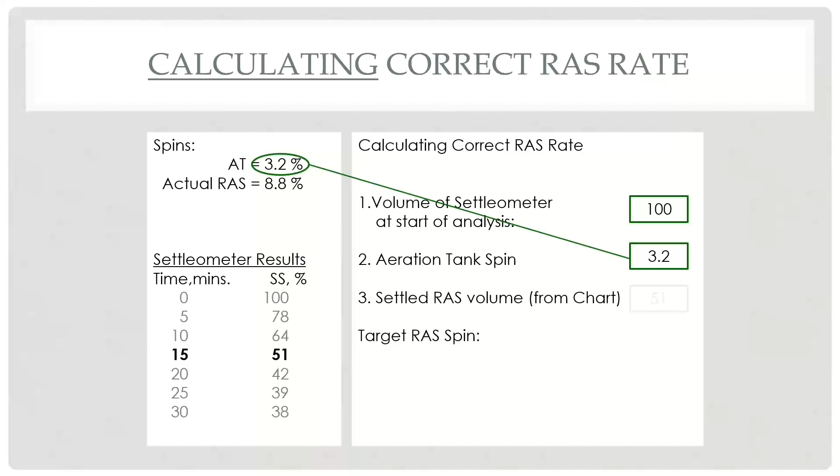So now we need to match our return sludge rate with the spin. We know we have 100 in our settleometer, and our aeration tank spin came back at 3.2, and we settled at 51 in 15 minutes. So we use that to calculate our target RAS rate. Based on those numbers, doing the calculations, 100 times our spin at 3.2 divided by 51 of our settling gives us a target spin rate, or our target return rate, of 6.3%. So we'll need to adjust because our actual RAS rate is 8.8%.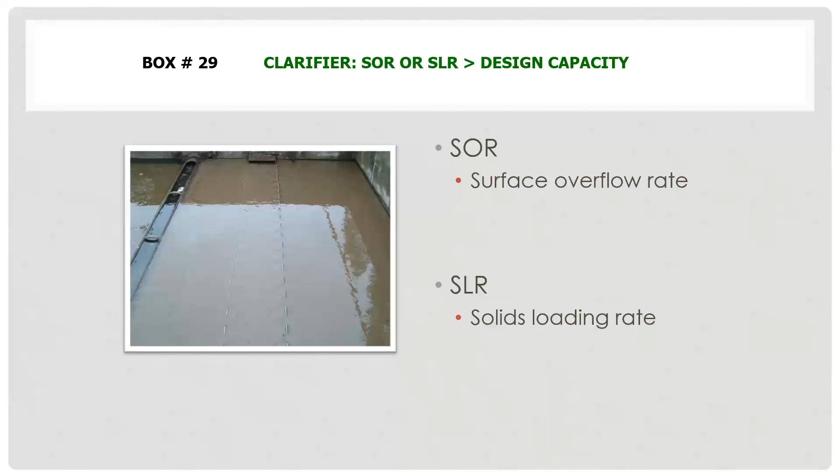Some of the other things we can look at are the surface overflow rate of your clarifier - do we have too much velocity going across the surface for the biomass to settle? The other thing we can look at is the solids loading rate - do we have too much solids being loaded onto the clarifier, impacting our settling and causing solids to be lost from the clarifier? Here's an example of the surface overflow rate from a clarifier based on what it is designed for, and here's an example of our solids loading rate from a clarifier.

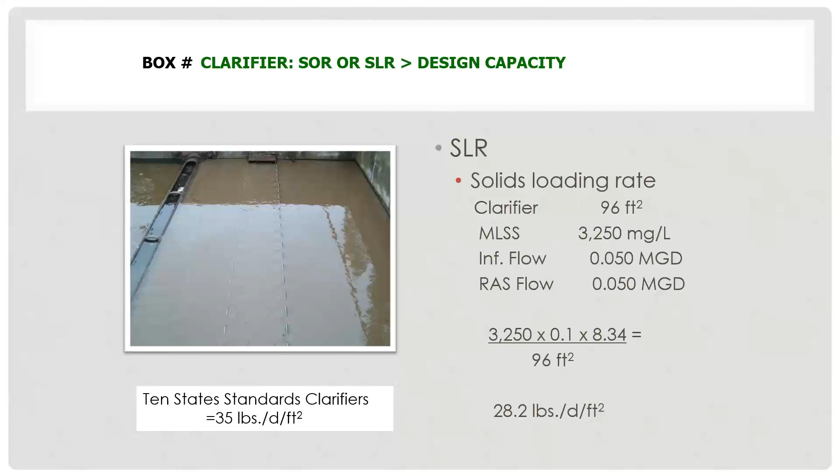Basically, what we're trying to drive home here is to use quick, easy methods to adjust your solid settling rate and come up with the best rate for the sludge that is grown, or the biomass in your plant. Use a settleometer and use the centrifuge.

We want our centrifuge spins for an aeration tank to be somewhere between 2 to 3, and then the return activated sludge to be somewhere between 2 to 3 times the aeration tank spin. If you start to get a return activated sludge spin of 4 times the aeration tank spin, you can get problems with settling, specifically in the clarifier. You can use the core sampler to confirm if you have too high of a blanket in your clarifier or not.

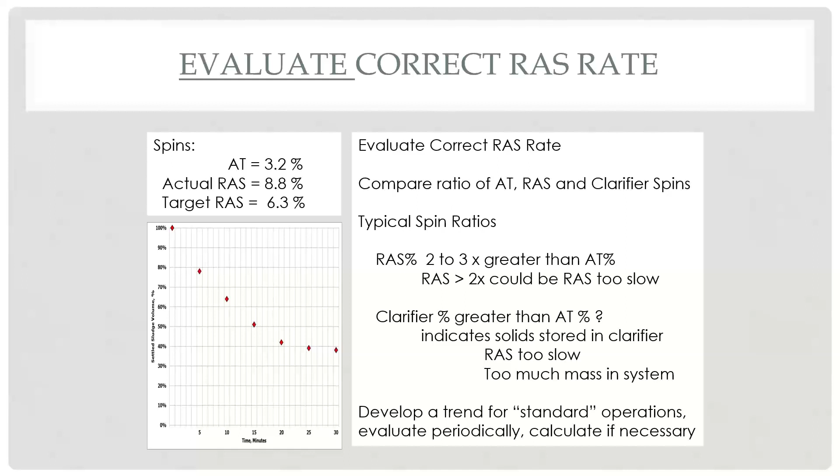Here's just an example of evaluating the correct return activated sludge rates. And with that, I think I have wrapped up the clarifier section, or settling section, of our process control chart. I will turn it over.

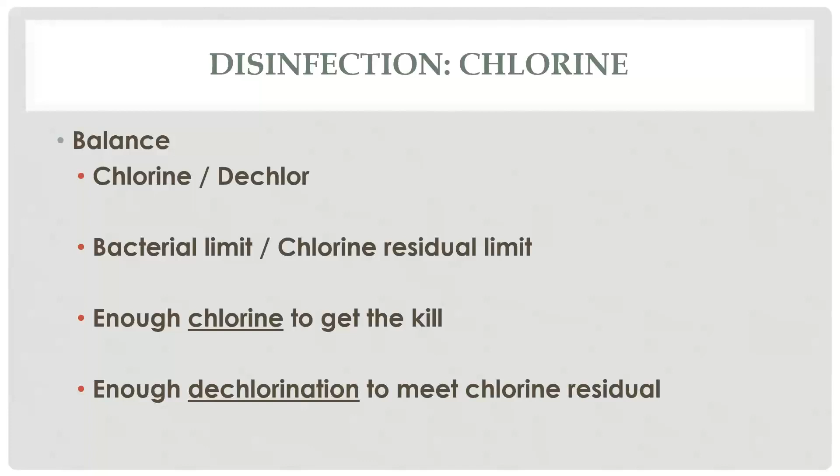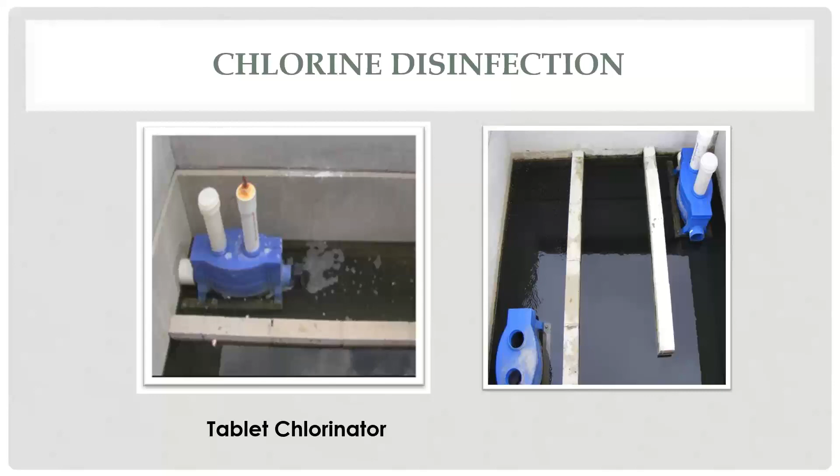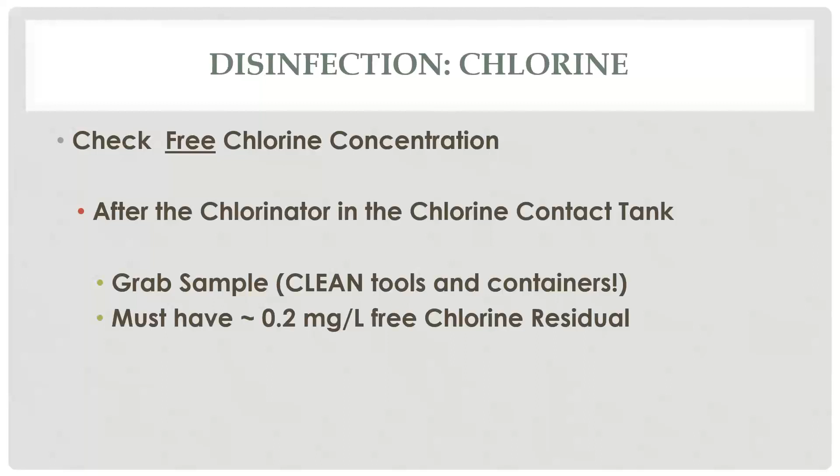Okay, so in order to make sure you get the kill, you have to check the free chlorine concentration. This is after the chlorinator in the chlorine contact tank. So you need a grab sample, clean tools and containers, and you must have 0.2 milligrams per liter of free chlorine residual in the tank. That just means you have enough left over to get the kill, and it's not 0, okay, because if you have 0, some bacteria will probably survive.

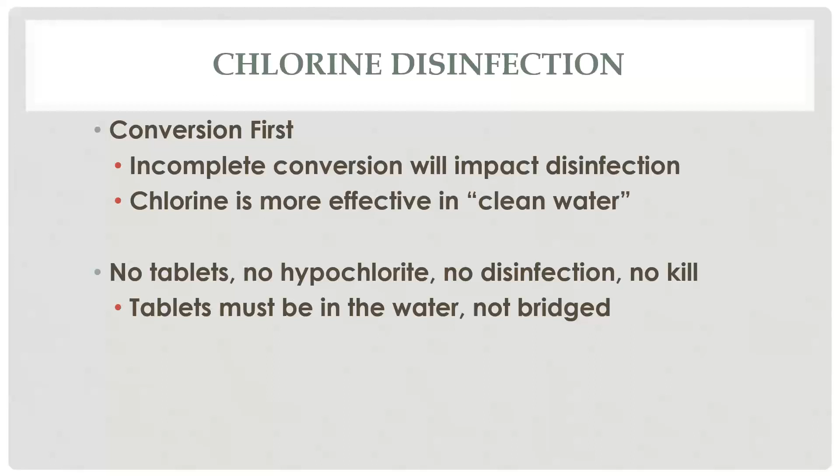Conversion first. Incomplete conversion will impact disinfection. If you have CBOD or ammonia in there, the chlorine will interact with those, and it will not disinfect all the bacteria. Chlorine is more effective in clean water. And if you have no tablets, no hypochlorite, or no disinfection, then you won't have any kill. Also, the tablets must be in the water, not bridged.

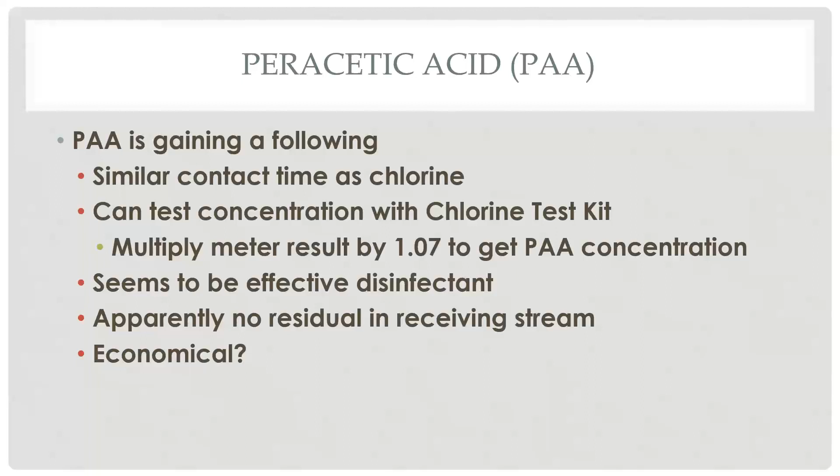Okay, let's look at peracetic acid now. Peracetic acid is gaining a following. It has similar contact time as chlorine. I called Hach and they said you can test concentration with PAA using a chlorine test kit. I did it and it worked, but I'd suggest you call them and verify that again. They said you multiply the meter result by 1.07 to get a PAA concentration. It seems to be an effective disinfectant, but apparently there's no residual in the receiving stream. But is it economical? I'm not sure about that, so I didn't pay for it.

So now we'll go to ultraviolet disinfection. Ultraviolet is very effective if the light can penetrate the water. There are some problems though. You have to have a proper hydraulic design. I was at a treatment system that flooded out the UV system, and the effluent that came on top of it didn't get disinfected, and that was a problem.

If you have low suspended solids versus high suspended solids, high solids will shade the UV from penetrating the bacteria and scrambling their DNA. And the bulbs must be clean, because they will heat up a little bit and you'll get some scaling on them. And of course, the unit must be powered.

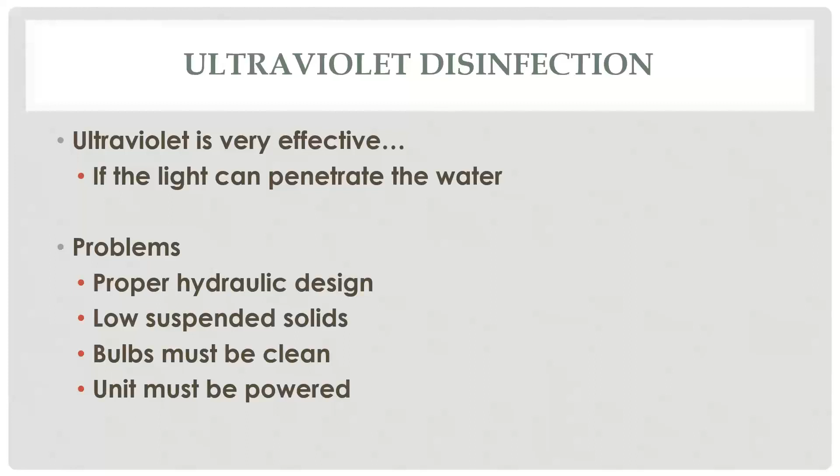Right there are some solids in the effluent of the UV channel - you can see the solids up there. But it works pretty doggone well if the light can penetrate into the bacteria.

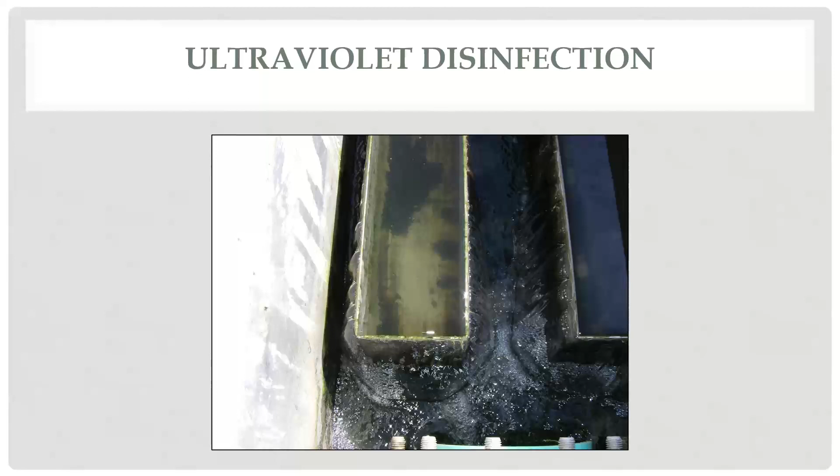This is a larger system where they have quite a few lights, 2 banks of these, about 10 of them there, I think. You can see that they're working because you can see the light shining out of the bottom. This is a bigger plant, and these are vertical, but this is when they are out of season.

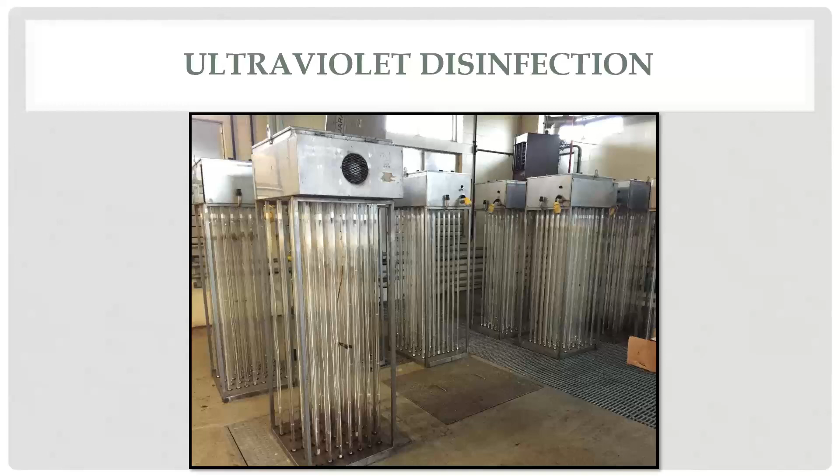In Ohio, in the streams, they have to disinfect from May 1st until October 31st. And if you're an Ohio River discharger, you have to disinfect all year round. But this one goes into a river, and people aren't in the river in the wintertime, so you usually don't have to disinfect then. And there is that same treatment plant working, okay?

So the light doesn't penetrate the water. Substances that impact UV transmission are things like dissolved iron ions, nitrate - though it has to be pretty high nitrate - dissolved organic matter will turn the water a little brownish, which can mess up the ultraviolet light a bit, and a variety of chemicals, which are pretty rare in large quantities, so you probably don't have to worry about those much.

So how good is your effluent? How do you know? Well, I have a UV transmissions meter. And if you aren't getting good kills in your UV system, call me. I can bring this out and I can run it.

What you do is you put DI water in it. You have a little square cuvette and you fill it with DI water and you calibrate it. Then you put it in, okay, it's calibrated with 100%. Then you pour that out and put the effluent in. The standard is 65%, and this is a little bit lower than that, 48.4%. So that might be a little low to get the kill you need to meet your permit.

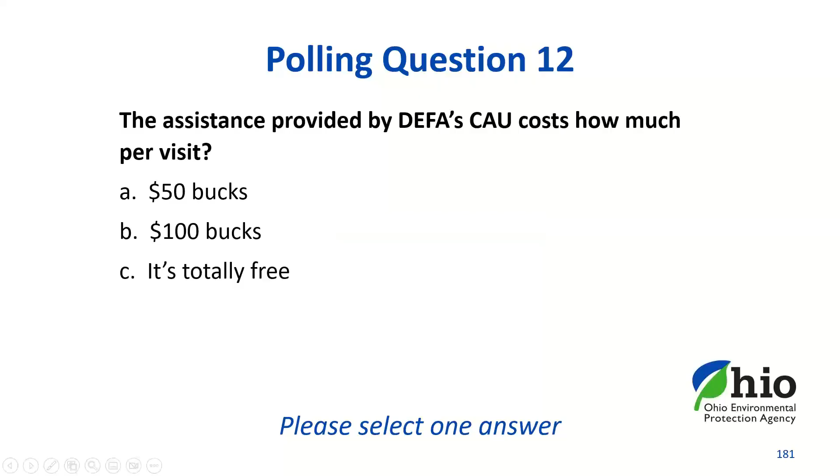Okay, and there are your results, John. It's totally free, which it is. Although I could use the $100, but it's totally free. So, questions? Okay, but anyway, here.

This is where we are located at the EPA, epa.ohio.gov, and you go to divisions and offices, and you go to the environmental and financial assistance. You look for wastewater treatment plants, and it says get free technical assistance to improve compliance. Then go to technical resources, and that's where the activated sludge process control and troubleshooting chart and manual are located, plus a whole lot of other things.

Or if that's too much trouble, you can email me or Andy or Nick. Those are our email addresses, and we can send them to you, okay? So that's it. That's the final part of our slide. So I'll turn it over to Mike or Helen or whoever's coming up next.